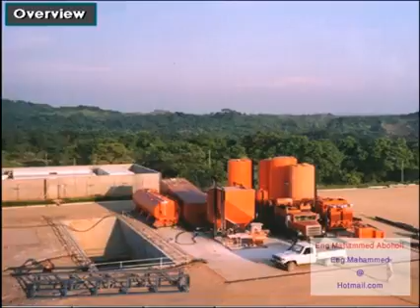Here is an overview of casings cemented in a well. Called primary cementing, the cement's main jobs are to completely isolate or totally seal off all the oil, gas, and water zones from the well bore, and to bond the casing firmly to the wall of the hole.

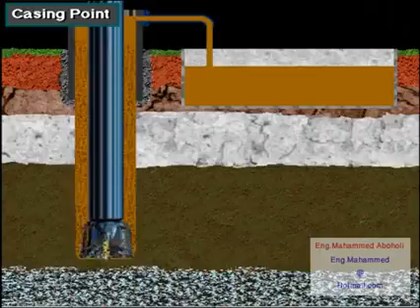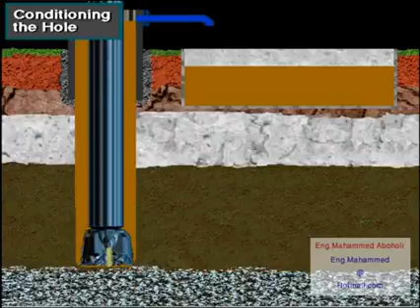Here, the crew has drilled the well to the casing point, the depth at which they will set and cement casing. The driller circulates drilling mud to clean the hole and to make sure the mud is in good condition. Then, the crew pulls the drill string out of the hole.

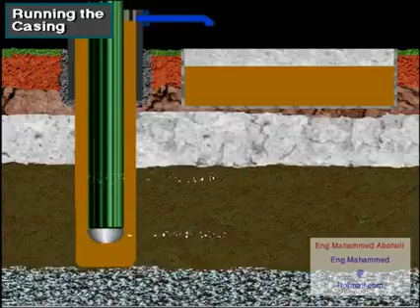The next step in primary cementing is for the casing crew to run the casing into the well, one joint at a time. Notice at the bottom of the casing the guide shoe and float collar. Also notice the centralizers and scratchers. The guide shoe guides the first joint of casing into the well bore.

A valve in the float collar lets the crew float the casing into the well to lessen the load on the rig's hoisting system. Centralizers keep the casing off the wall of the hole to ensure a good cement job, and scratchers remove wall cake to ensure a good cement bond to the wall of the hole.

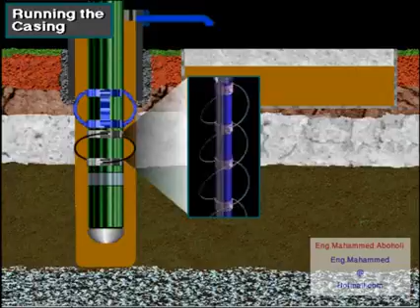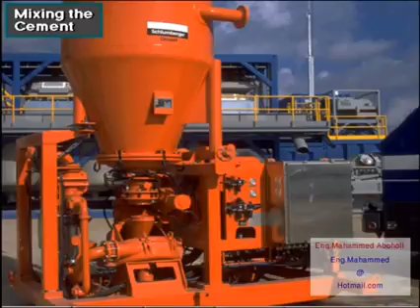The cementing crew next readies a cementing unit. The cementing unit rapidly mixes water, dry cement, and special additives to the cement to make a liquid cement slurry. A high-pressure cement pumping unit moves the slurry down the casing.

To get the cement slurry down the casing, the cementing crew makes up a cementing head, also called a plug container, on the top joint of casing suspended in the rig's elevator. The cementing head has an inlet for the cement slurry from the cement pump. Slurry enters the head at the connection on the side.

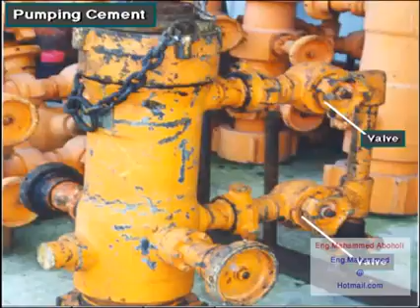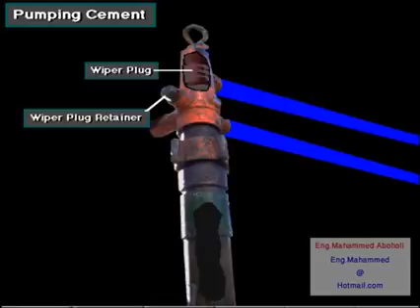The valves on the head allow the crew to control the point at which the slurry enters the head. From the cementing head, the slurry goes into the casing. The head also holds special plugs called wiper plugs. The wiper plug retainers keep the wiper plugs in the head until the crew releases them to allow the plugs to be pumped down the casing.

The fluid inlet allows the crew to pump mud, water, or a special displacement fluid, the fluid that pushes the cement into the annulus. This head holds two wiper plugs, a bottom wiper plug and a top wiper plug. The bottom plug goes into the casing first. It wipes mud off the inside of the casing and separates the mud from the cement.

The top plug follows the last of the cement into the casing. It wipes cement off the inside of the casing and separates cement from the displacement fluid. Often, the wiper plugs are identified by different colors to avoid confusion. The bottom plug is usually red or orange.

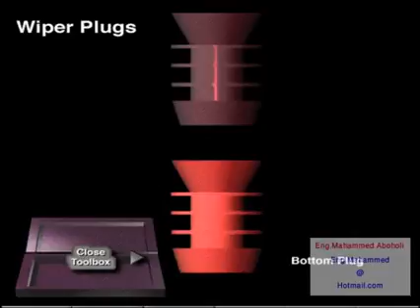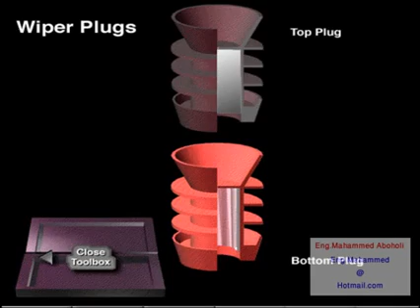It has a diaphragm that breaks when the plug gets to the bottom of the casing string, so the cement can pass through the plug. The top plug is usually black. Cement pump pressure moves the cement slurry to the cementing head, where a crew member releases the bottom wiper plug. Slurry pushes the bottom plug down the casing until it seats in the float collar.

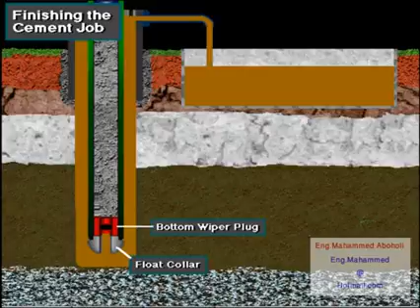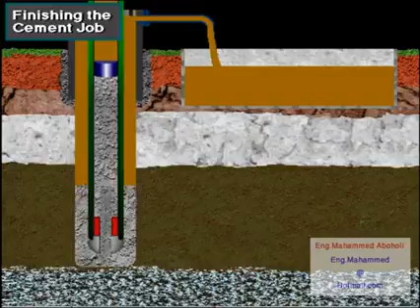When the plug seats, continued pump pressure on the slurry ruptures a diaphragm on the bottom of the plug. This allows cement slurry to go out the guide shoe and into the annulus. When the calculated amount of cement slurry has been pumped, a crew member releases the top wiper plug.

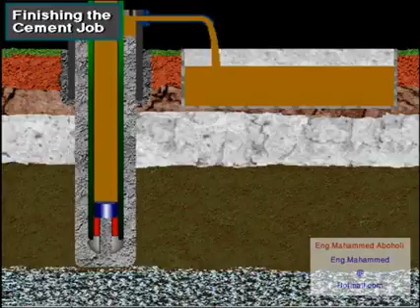Displacement fluid forces the top wiper plug down the casing until it seats in the float collar on the top of the bottom plug. Because the top plug is solid, pump pressure rises when the plug seats. A sharp rise in pump pressure signals the pump operator to shut down the pump.

The float valve holds the cement in place, not allowing it to U-tube back into the casing once it is displaced into the annulus. The cementing job is complete. Depending on hole conditions and the type of cement used, the cement slurry hardens or sets up firmly, generally within 12 to 24 hours.